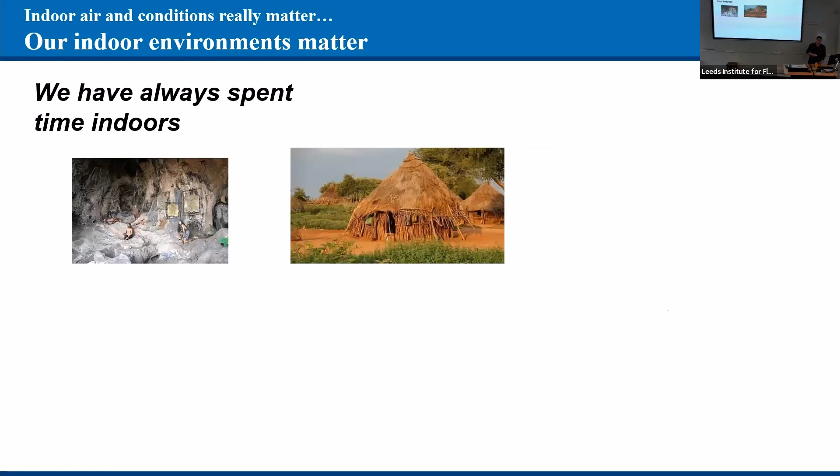So we've always spent time indoors, but we've never spent as much time indoors as we do now. And wherever you look, you get slightly different estimates, but it's a large chunk, 80 to 90% of our time indoors. And that means that our time indoors has enormous consequences in a number of ways.

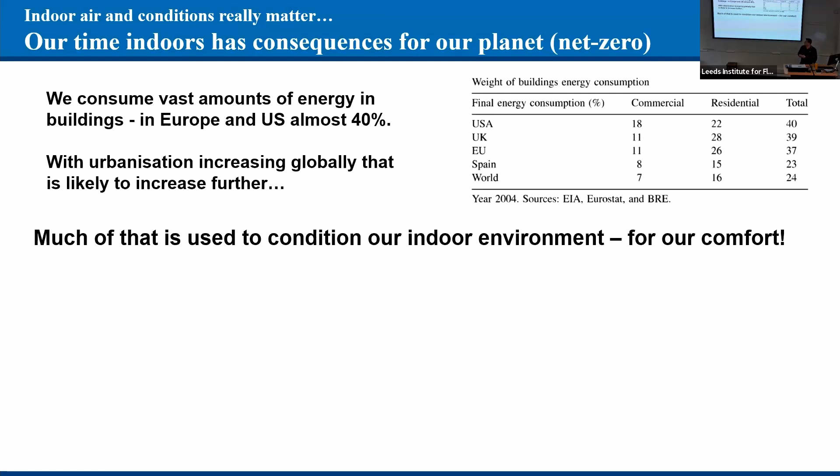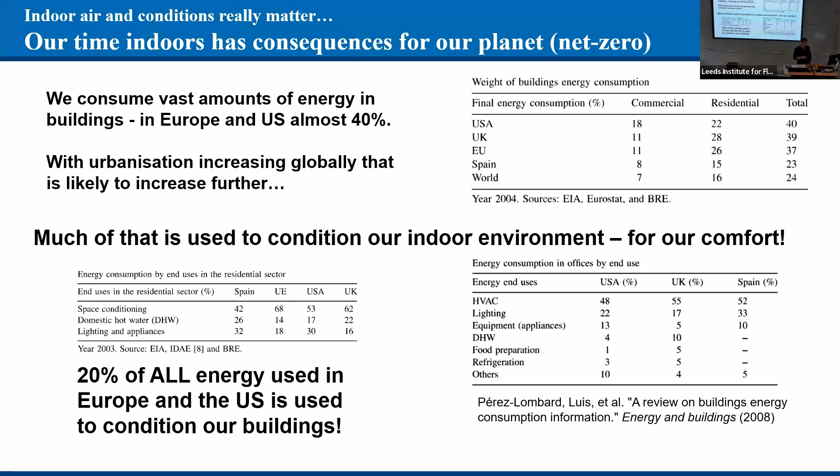The first of which is our energy consumption and the implications for our planet, and what we increasingly call net zero. In the Western world, we consume almost 40% of our energy in buildings, and a big chunk of that is used just to condition the indoor environments that we experience. So you end up realizing that we consume about 20% of our total energy budget just in conditioning our indoor environment. A really important factor for net zero.

Our time indoors also has consequences for our health. And those health outcomes are derived from the exposures that we have indoors. This review attributes around 3 million deaths per year to indoor air. So it's very significant - the time that we spend indoors has massive impacts on our health and well-being. I think that's something that research is starting to unpack more quantitatively as we look forward.

Crucially for economics, it also affects our productivity. We know that going from poor air quality environments to good air quality environments improves our cognitive function and productivity. And we've already said that indoor environments are really crucial for meeting net zero. So these are all really big motivators for research and also levers for change, but they're not all well used.

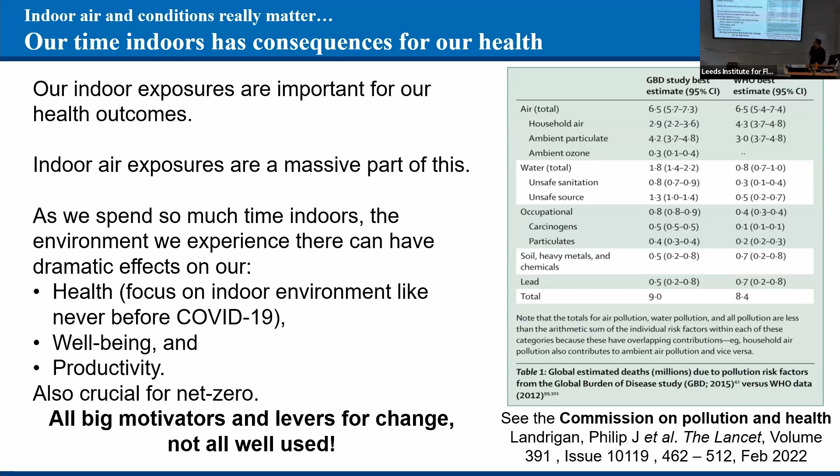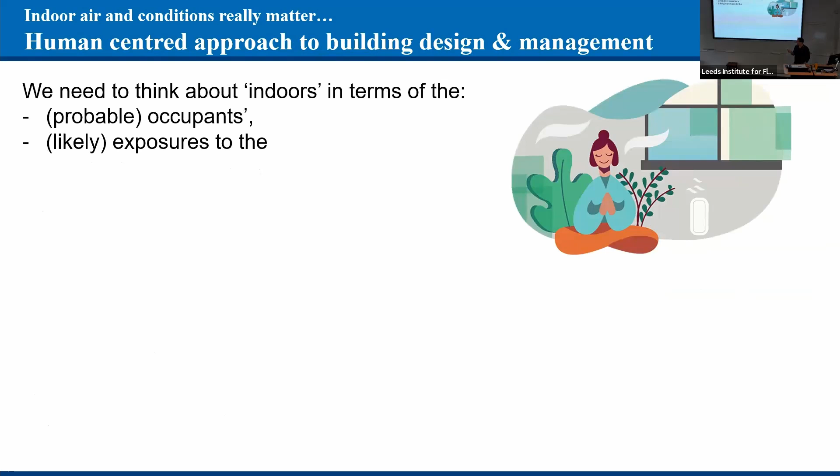And I think, when I met Kath, it really changed the way I think about buildings - to think from a human-centric perspective. So when I think about indoors now, I try and think about the occupants that might be there. I think about the likely exposures that they'll be subject to as a result of the indoor conditions and scalars there. And when we start to think about scalars, here we're including things like heat, moisture, and pollutants.

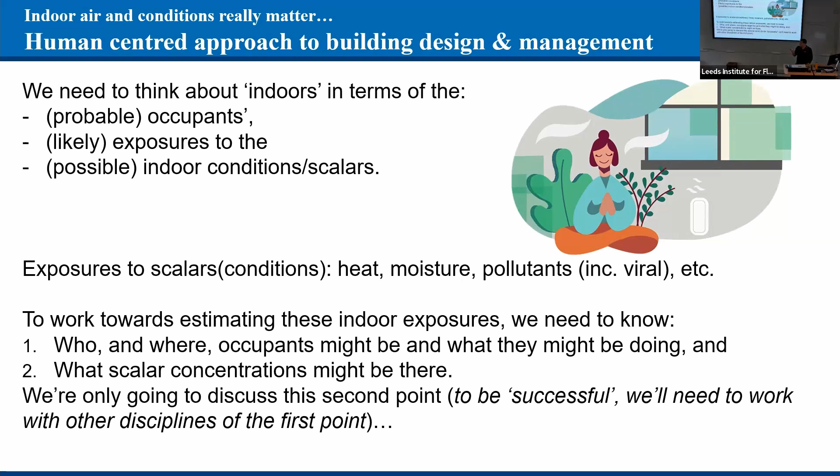But if we want to really know and predict what people's indoor exposures are, we'd need to know who and where the occupants are and what they might be doing, because their activities both change the production of pollutants and also change their breathing rate. And then we need to really have some way of estimating what scalar concentrations they might experience - that might be the temperatures that they feel or the pollutants that they might be breathing. So the first point is really interesting and something worth exploring, but the second point, what are the scalar concentrations, is what I'm really going to start focusing on today.

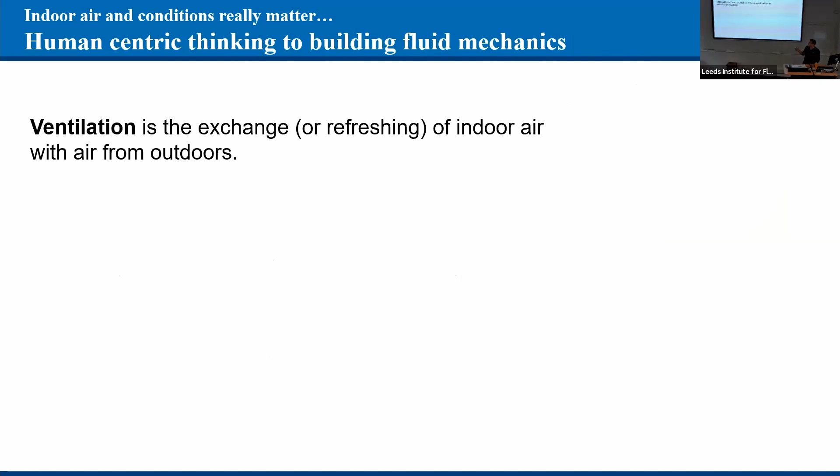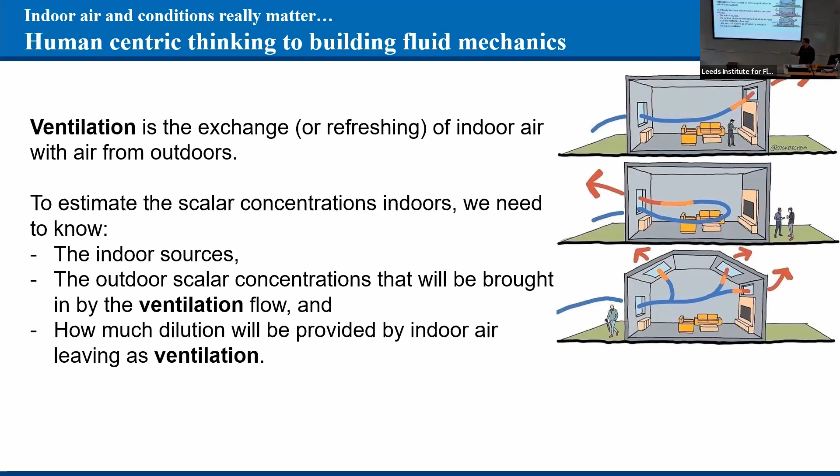You can instantly see these would have marked differences in the flows and exposures. So if we want to estimate the scalar concentrations, we need to think about the indoor sources, but we also need to think about the outdoor sources of scalars, and then the ventilation rates that might bring those outdoor scalars in. As the ventilating flow leaves, it will be providing some dilution. Two of these aspects are really dominated by ventilation, and that's what I'm going to focus on today.

We classify ventilation based on the forcing across the building envelope. When it's driven by fans, we call it mechanical ventilation. When it's driven by wind and/or buoyancy, we call it natural ventilation. And when we have a bit of forcing from each ventilation type, we call it hybrid ventilation. If we think about buildings, really everything's hybrid. You always have some extract, often in bathrooms, and whenever you open a door, you always drive a natural ventilation flow.

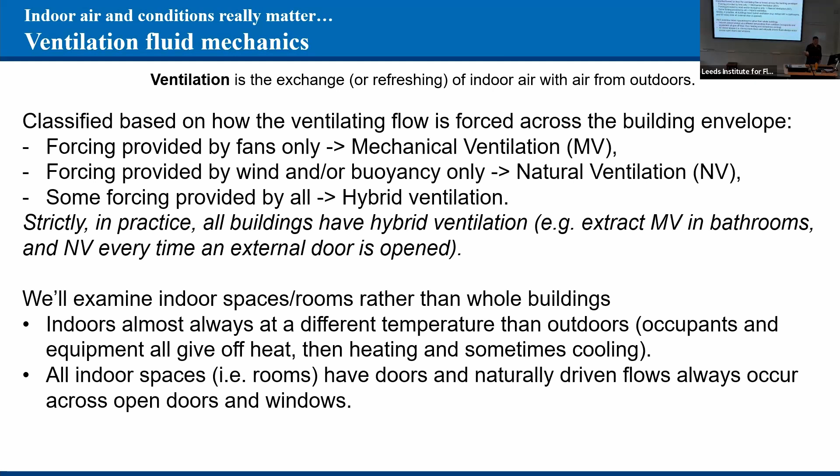So it's worth zooming in to the room scale to carry out some more detailed thinking and research. It's worth noting that indoors is almost always at a different temperature to outdoors. Because we want to move around our buildings, we always have doors, and so we always drive naturally ventilated flows across both open doors and open windows. So I'm going to talk predominantly around natural ventilation flows.

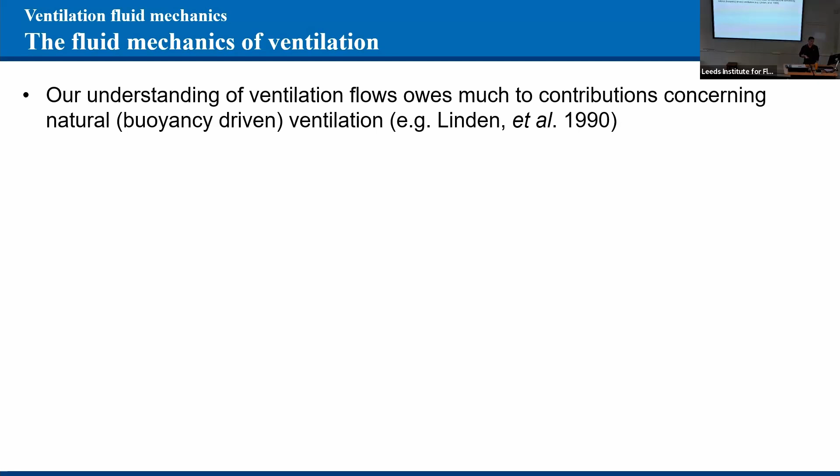Our understanding of natural ventilation flows really owes a lot to work done in the 80s and 90s, this seminal work by Linden, Lane-Serff, and Smeed, looking at buoyancy-driven displacement ventilation. But it's worth reflecting that this builds on work first done in the 30s to 50s on natural convection and plumes. And it was Baines and Turner who in the 60s thought to put these flows inside boxes, and it was that idea of translating this box model work into an analogue of rooms that really pioneered the study of natural ventilation.

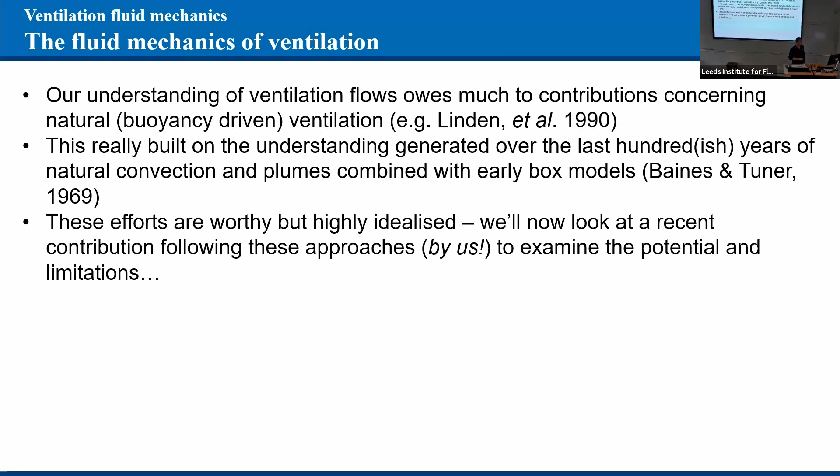These are academically very worthy, and we've learned a lot of useful things from them, but they are highly idealized flows. So I want to very honestly explore the potentials and limitations of these approaches, and I do so through some work that we've done. We're going to keep things really simple and only think about steady state ventilation flows in an isolated room.

We're going to have one door and one high level opening. And then we always have heat sources, but we're going to start by idealizing these into a single local heat source.

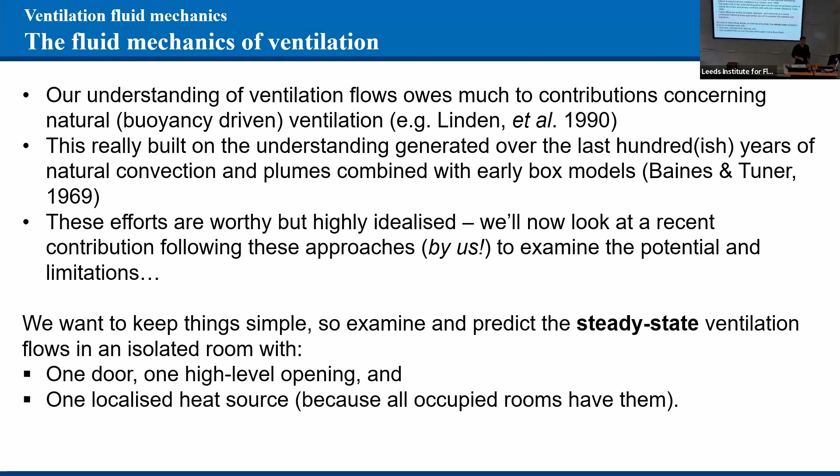So what might we get in this simplest case? If we look at Linden, Lane-Serff and Smeed, they had a high and low level vent, and they got a stratification at some height h. Because we're steady state, we conserve volume and buoyancy fluxes, and that tells us the upper layer must be well mixed. We expect there's going to be a turbulent plume formed in the lower layer. The equal and opposite ventilating flow in and out must be equal to the flow in the plume at the height of the interface, because there is no flow across the interface outside of the plume. So if we know the height of the interface h, then from plume theory, we will know the ventilation flow.

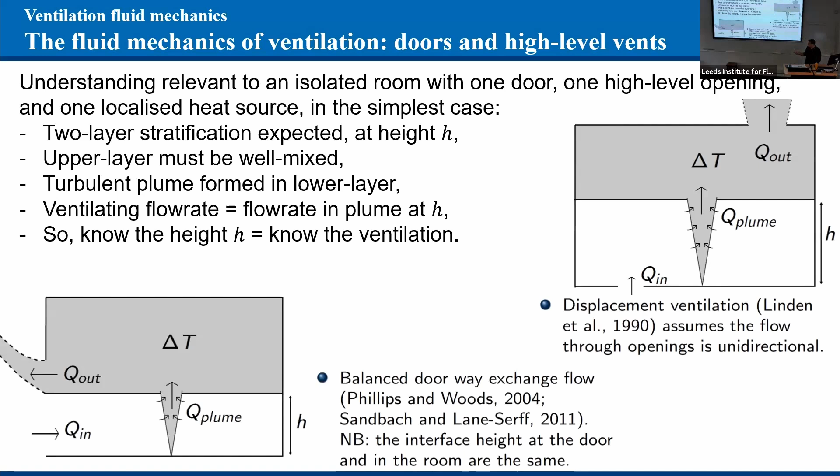The other body of work relevant to this configuration is these balanced exchange flows. Here we've got a doorway and no other ventilation openings, so the inflow and outflow across the door must be equal and opposite. Crucially, the physics is such that we can assume the interface height at the door is equal to the interface height at the room.

So when we look at our example, we have part of the outflow going through the top vent and part of it leaving through the top of the doorway. We call this an unbalanced exchange flow because the doorway exchange is not equal and opposite, and it means we can no longer assume that the interface height at the doorway is equal to the interface height within the room.

It turns out Tom did some nice experiments and realized there are at least three flow regimes. This is the classic Linden, Lane-Serff displacement ventilation, where the interface forms above the doorway because either the room is tall relative to the doorway or the top vent is large. Change things so the interface comes down within the room, and you can get an arrested doorway flow where the interface is below, but the characteristic buoyancy speed out is less than the characteristic ventilation velocity coming in, and it arrests the flow.

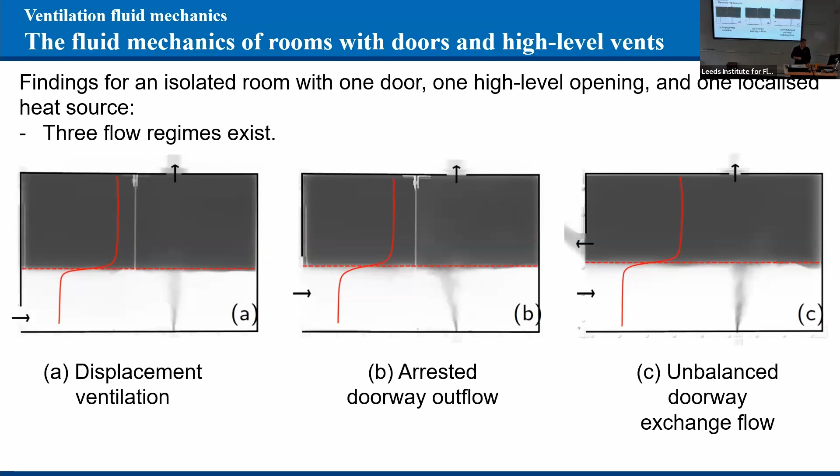But we're going to focus on this third type, the unbalanced exchange flow, which I just described to you. So as is standard in building fluid mechanics, we assume air to be incompressible and the flows to be Boussinesq.

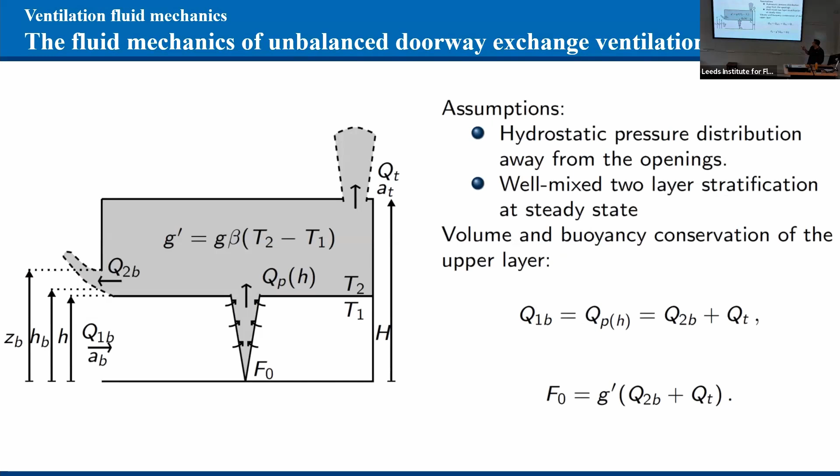We take the pressure to be hydrostatically distributed away from the vents, and the steady state imposes that this upper layer must be well mixed. And then we can start writing down key facts.

One is the description of the flow in the plume at the height of the interface. We then rest on the concept of a neutral pressure level, which, when you think about it, the pressure distribution inside and outside the room are such there must be a point within the height of the room at which the pressure is equal inside and outside of the room. And that height we call Hn.

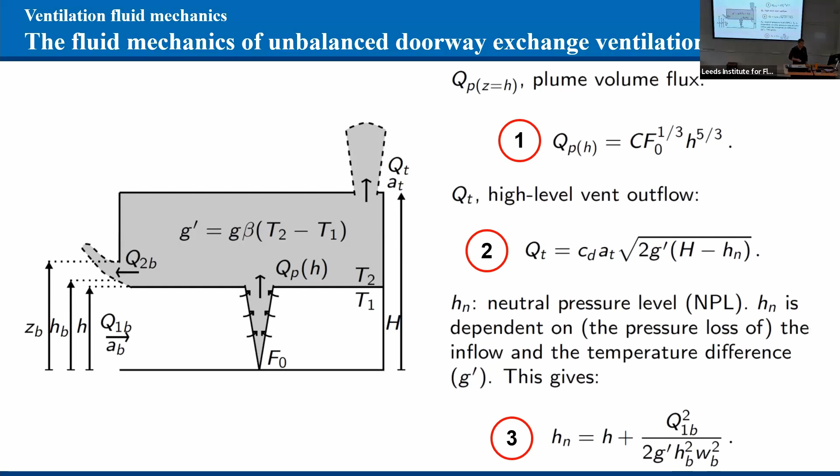And it's the buoyancy potential above that height that's going to drive the flow through the top vent. The difference between the neutral pressure level and the height of the interface is set by the energy head loss of the inflow, which we take to be fully dissipated in the lower layer without consequence. And then we need to lean on two-layer hydraulic flows to look at a composite Froude number and know that must be unity.

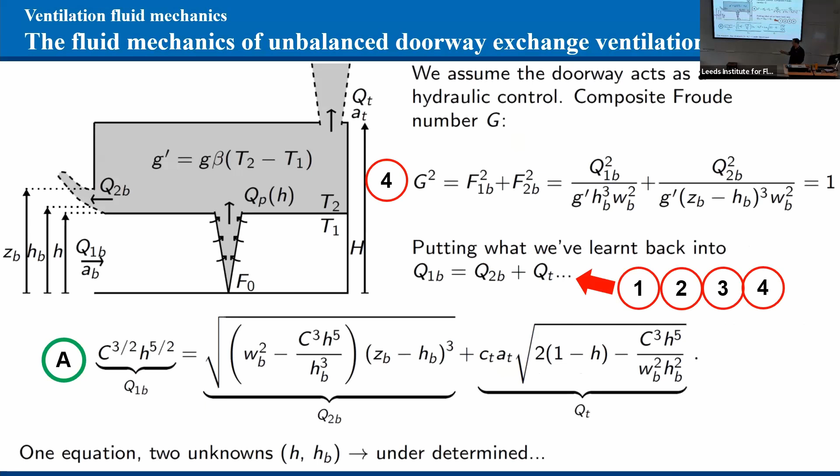We shove all of that back into our conservation of volume, and we end up with one equation, but we have two unknowns, our interface height in the room and our interface height at the doorway. And so we need more.

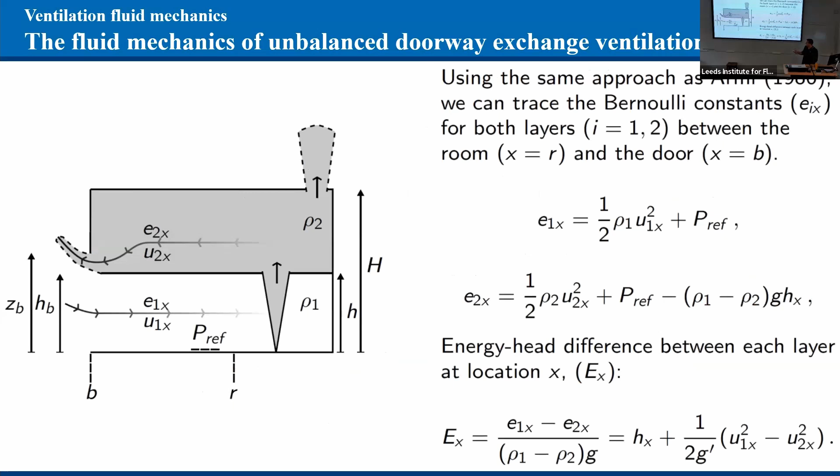And we go to look at the energetics of the layers, the two layers, and we look at the energy head difference between the lower layer and the upper layer. And we do so at the door and in the room. And then we ask, what's the change in the energy head difference between the doorway and the room? We argue that must be set equal to the loss of kinetic energy head in the incoming ventilation flow. And this gives us another equation.

We reuse our Froude number, we rearrange our plume theory, and now we have a second equation, again in our two unknowns. And so we have a closed system, and we can predict the interface height.

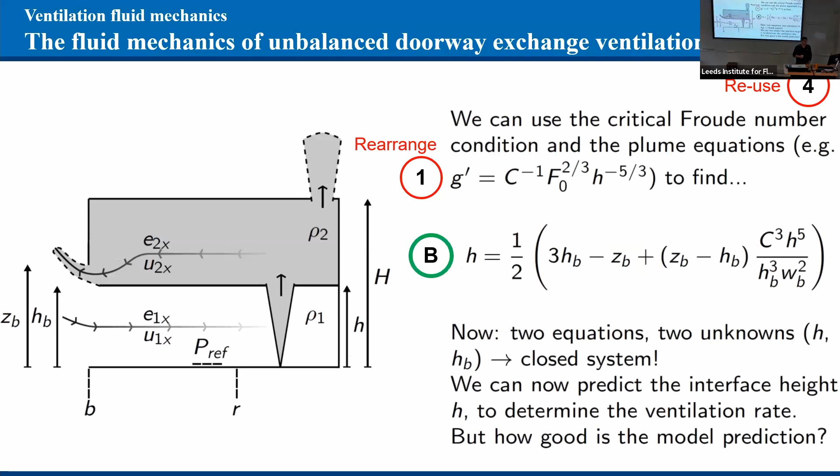So the question is, how good is the model? Tom does some experiments. You can see over here on the right, he's tracking the interface height, going through some transients, starting to settle to a steady state. In the black, a nice quantitative evidence of a relatively sharp two-layer stratification.

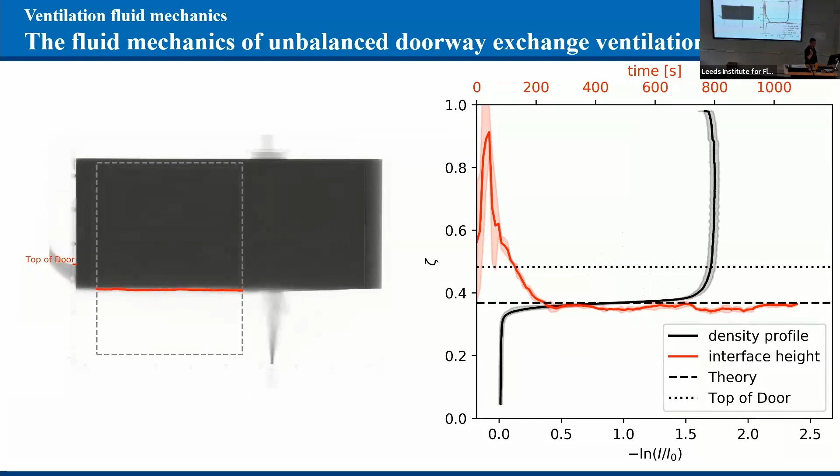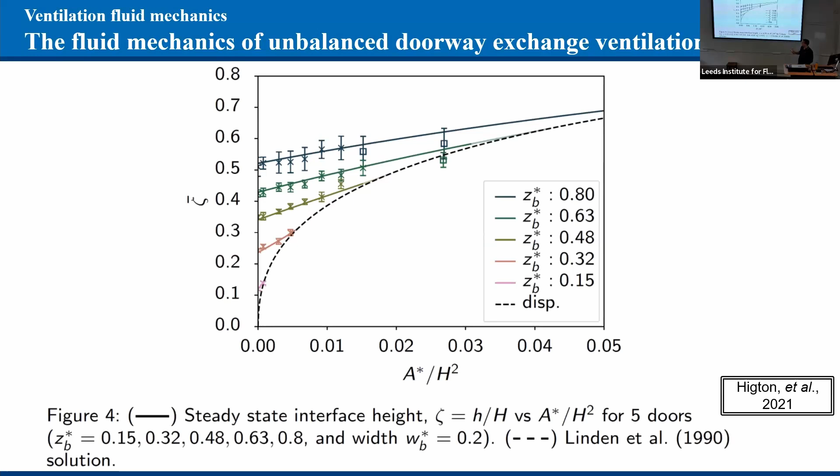And this interface height is heading nicely towards the theoretical prediction. Tom here has chosen a dimensionless doorway width, and then shown data for five different dimensionless door heights. The markers are his experimental data, and the appropriately colored lines are the theory for that configuration. So the model works well.

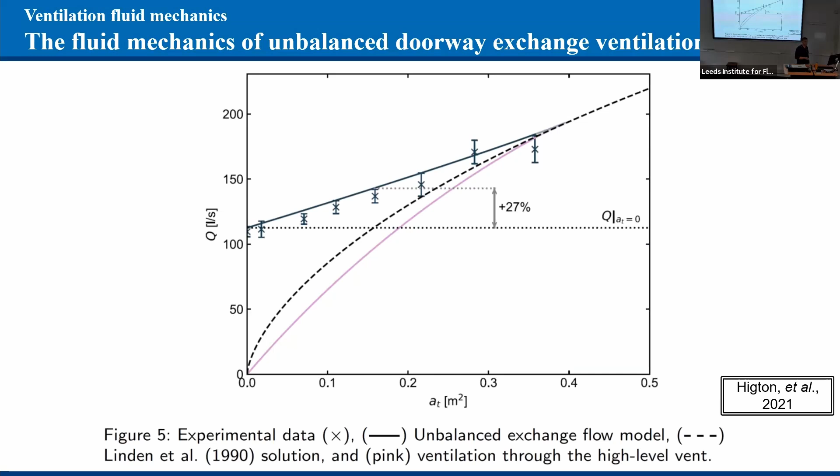So after all of this, what have we really learned? I think my takeaway message is that even the simple, think about the simplicity of the configuration, it's not simple to analyze by any means. And then reflect that we arbitrarily chose to localize all of our heat inputs into a single point. Well, what happens if we had gone the other way and said, let's just uniformly distribute our heat source all over the floor? What's going to change?

So I'll show you a video of this, but the important thing to say is you can think of this as being a heated floor, and you've got a top vent up here and a doorway up to about this height. The crucial thing here is that before I start the video, Tom has spent about an hour running this experiment to steady state, so all of the flow is in a quasi-steady state.

About 10 seconds before the video starts, he's burst a balloon of neutrally buoyant fluid outside the door. Your eye is going to be drawn to seeing this transient scalar evolution, but remember that the scalar is just evolving in a steady state flow.

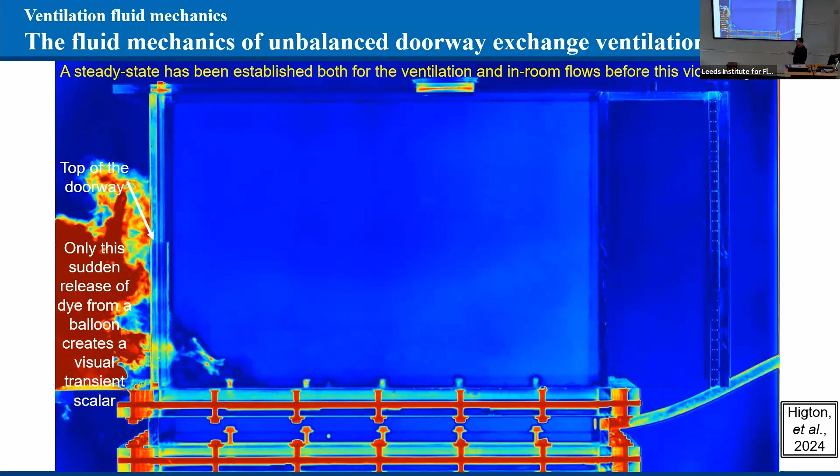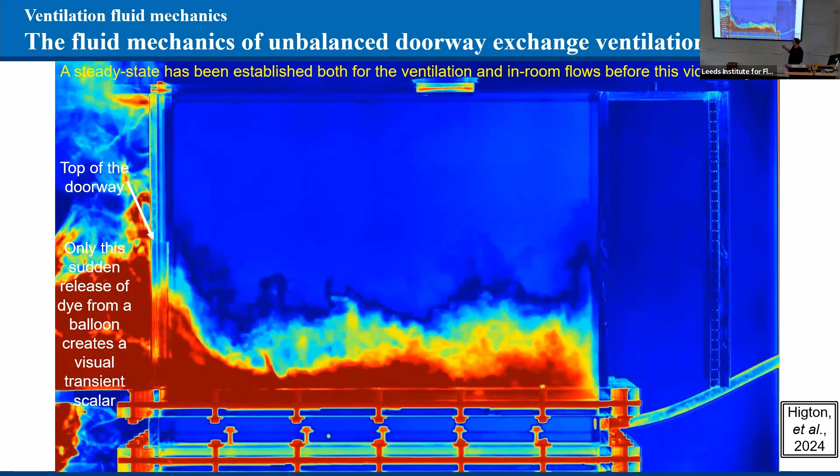So what happens, we can start to see, call it cold air if you like, coming in through the lower part of the door, and presumably some undyed fluid is leaving through the upper part. This relatively cold air-like fluid travels along, getting warmed. It rises up this far wall, and some of this flow has enough momentum and or buoyancy that it gets carried up and out of the top vent.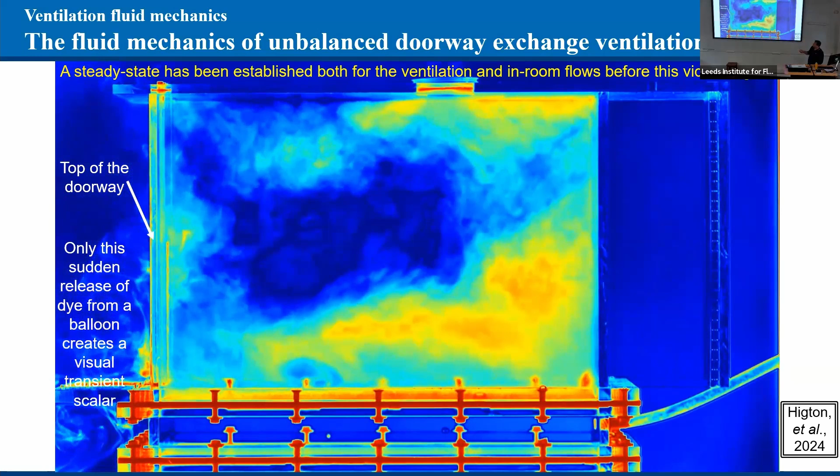But what you'll start to see is that not all of this rising flow is going up the wall. Some of it is exhibiting fountain-like dynamics here, slumping back down, and we're going to start to see the dye evidencing that the flow also has an intruding gravity current going right to left in this video, and that would ultimately carry on and go up and out the window. We'll stop the video before you see that, but just note that the dye, at least in this scenario, is indicating that the flow is not well mixed by any means.

So we've just changed to the second easiest canonical case, and things are really difficult to understand.

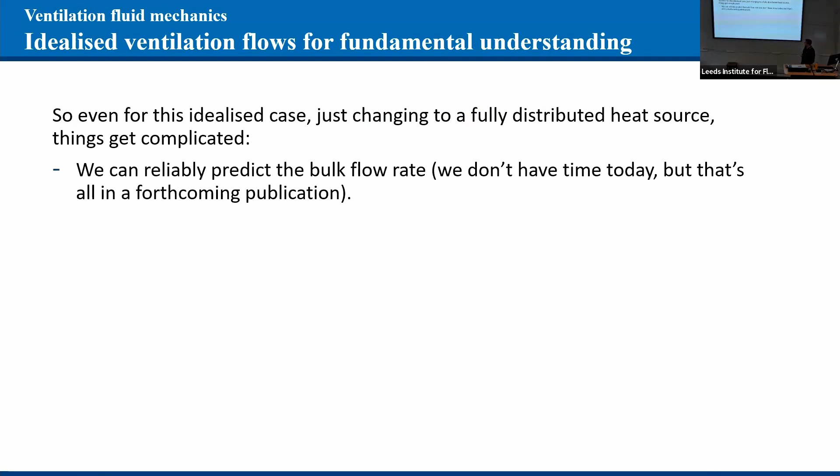Reassuringly, we can predict the bulk flow rate, but that's no good if you want to think about exposures. If you want to think about exposures, you need to be able to predict the in-room flow, and we can't do that at the moment. Let alone if thinking about how comfortable people feel depends on the stratification—there's no simple modelling to explain either.

So let's make things slightly simpler and go back to the displacement flow case, but we're going to keep our distributed heat source. All the theory predicts that we should get a well-mixed room. And then Carol Ann did some very nice numerical simulations. These were really hard because we wanted this room, which is this middle box, to be naturally ventilated. So you need these really quite large domains above and below to actually ensure that the flow isn't affected by your ultimate boundary conditions.

This is the schematic of the classroom. Carol Ann's inputting heat along the floor. You can see a lower vent on this side, and then Carol Ann's going to look at two configurations: a single-ended case where the vent is at the same end of the room as the low-level vent, and an opposite-ended case where the top vent is moved to the far end of the room.

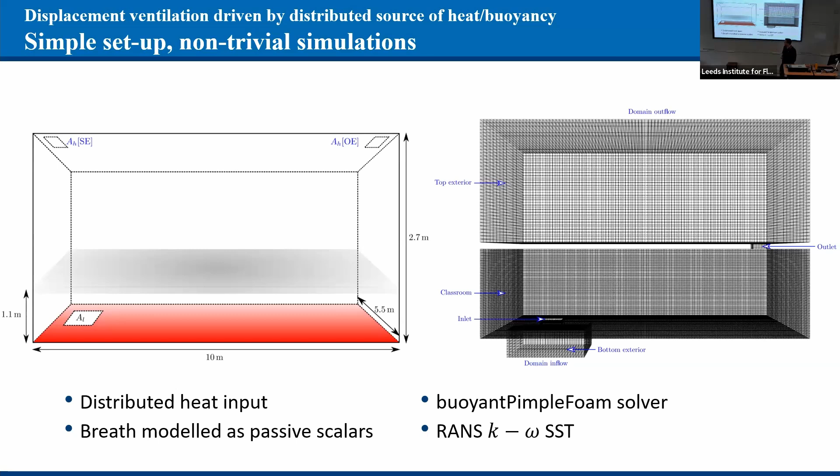And then we're going to introduce within this breathing zone a scalar marking the CO2 emitted by 32 people's breath. And when we look at the streamlines of the age of air here, we can already see drastic differences between the single-ended case and the opposite-ended case.

This part of the flow is looking quite similar to Tom's experiment—it's running along the floor and up and out. Obviously, Carol Ann doesn't have an outflow back over here, as Tom did. But in the single-sided case, we're getting a much larger whole-room circulation.

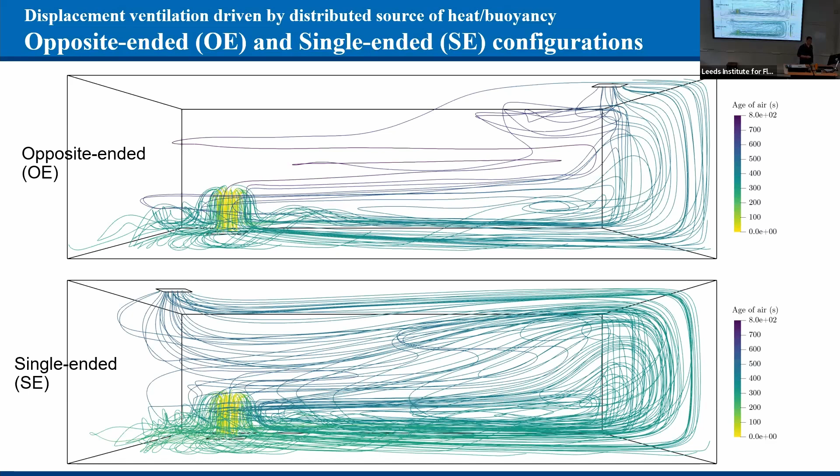So if we look at the temperature and CO2, and we mark the predictions of a well-mixed model with these dotted vertical lines—opposite-ended configuration in blue, single-ended in red—for the temperature in the upper part of the room, we get something close to the well-mixed predictions, but then we're getting a marked cooler region for a large chunk of the room. And if you look, temperature differences of 2-4 degrees are really enormous, and occupants would feel that very strongly.

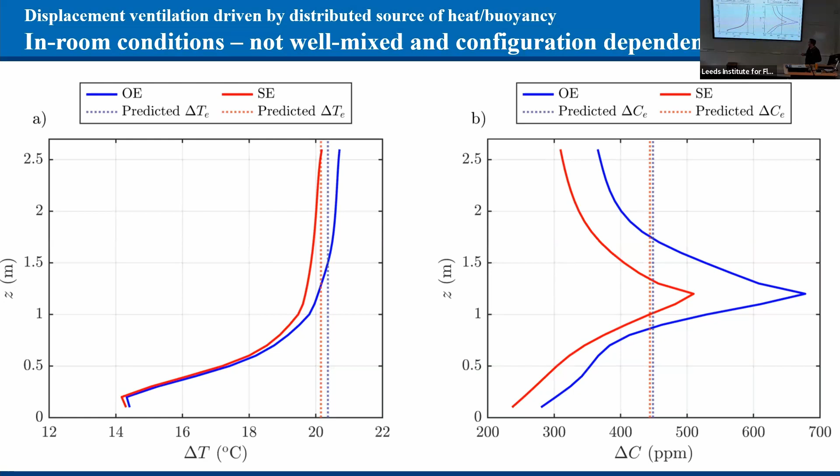CO2, we get a completely non-monotonic distribution with peaks in the breathing zone, very, very different to a well-mixed space. And whether we look at the CO2 distributions in the whole room, or perhaps more relevantly, just in the breathing zone, we first of all see that the distributions are wide—they're very far from being well mixed. But importantly, they differ quite drastically between the two configurations, and there's no modeling that would capture that that's being developed at the moment.

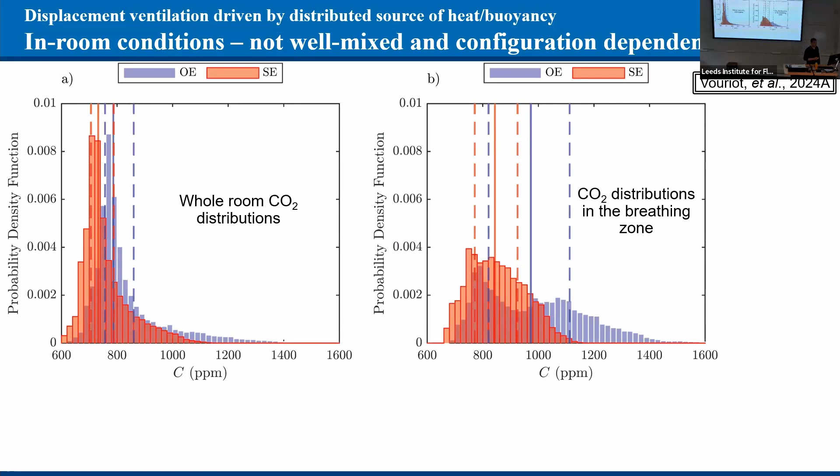And then we take a deep breath and we look at actually what we're doing. Remember that models are just models, and we're missing so much important physics in these models, and it's already quite complicated. So the three things that came to my mind are: one, in real rooms, there's a lot of additional mixing, and that can be occupant movement.

Which I think Kath and Andy Woods have looked at a bit in corridors. Could be opening and closing doors—Abigail Hathway's looked at that a bit. But we need to get these things systematically built into our thinking and modeling of indoor environments.

And then there's radiation. Radiation acts to redistribute heat between any warmer and cooler surface in the room, and that includes our skin. We give off about 50% of our sensible metabolic heat output as radiation.

And then, of course, we've been looking at steady states, but all rooms are transient. So at best, we need to be thinking about this sort of system moving dynamically from one steady state towards another.

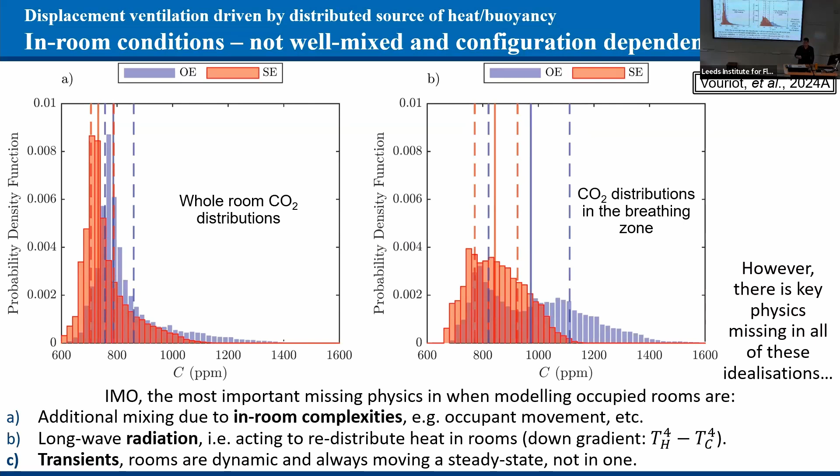But I'm just going to talk about one of these, radiation. And again, we're going to do some numerical simulations of displacement ventilation. And we're just going to have a single occupant in the room.

Our single occupant - our dimensionless room height is 1 at the ceiling, and our occupant is standing up, giving off heat up to about 70% of the height of the room. If you do some simple theory, it predicts that you'll get a well-mixed lower layer to about 60% of the room height.

And if you run the numerical model without any radiation, the temperature distribution, or buoyancy equivalently, you get is shown here. And it's not bad - it's roughly a well-mixed lower layer up to about 60%.

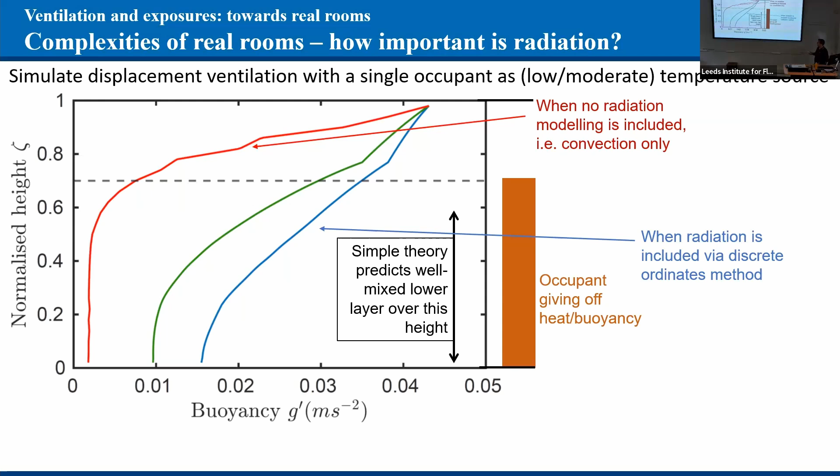But then if you run the same simulation, just with radiation included, and we're not changing the total heat flux, we're just changing it from all convection to 50% radiation, 50% convection, then your temperature distribution in your room completely changes.

So we have done quite a lot of work thinking about how we could mimic this. The radiation simulations take about 3 to 4 times as long to run, much more painful to set up. And so we've been thinking about simple methods that don't increase the runtime if you do a bit of thinking in advance, but they're far from perfect.

So for radiation, at least, I think we've got a long way to go, but I think it's something we will make progress on over the next years.

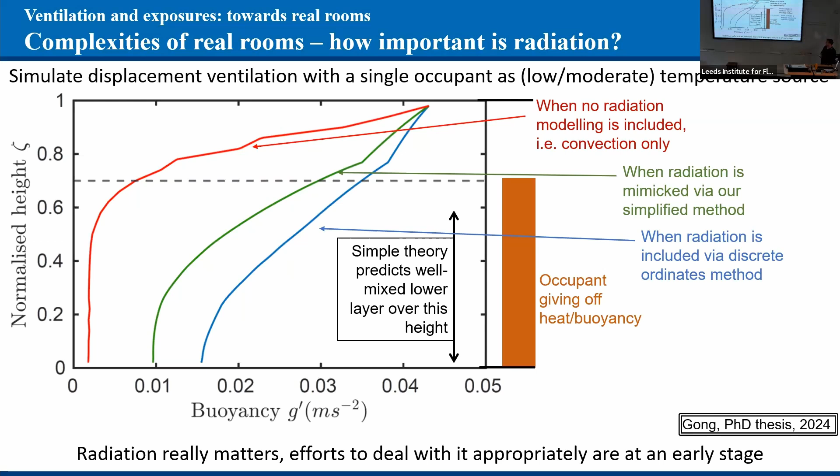So we've seen that the fundamental bottom-up approaches have really made huge contributions, and I'm sure they will do as we move forward. But there's a drastic gap between doing what we need, which is to be able to model and predict the environments that humans experience in our buildings, and what we can actually do based on existing knowledge.

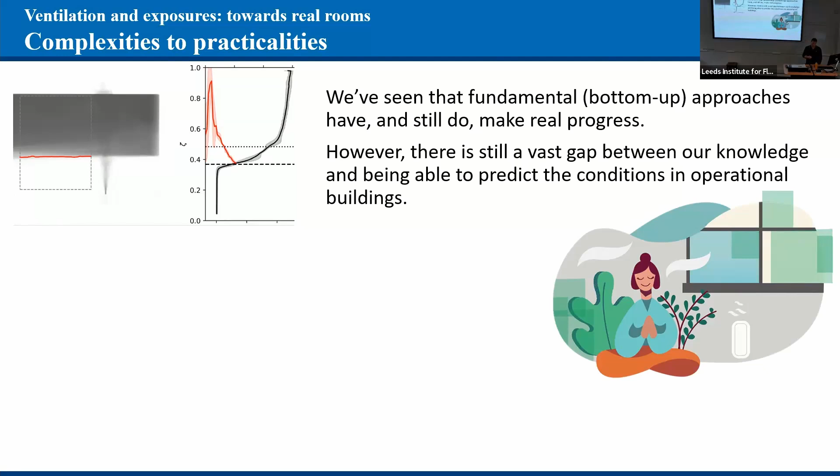And I think that's led me to reflect that we need to really embrace this top-down approach as well. That's particularly realized because indoor environments are so easily exploited in terms of becoming a data-rich environment, and that's not been done to the extent that it can be based on modern technologies.

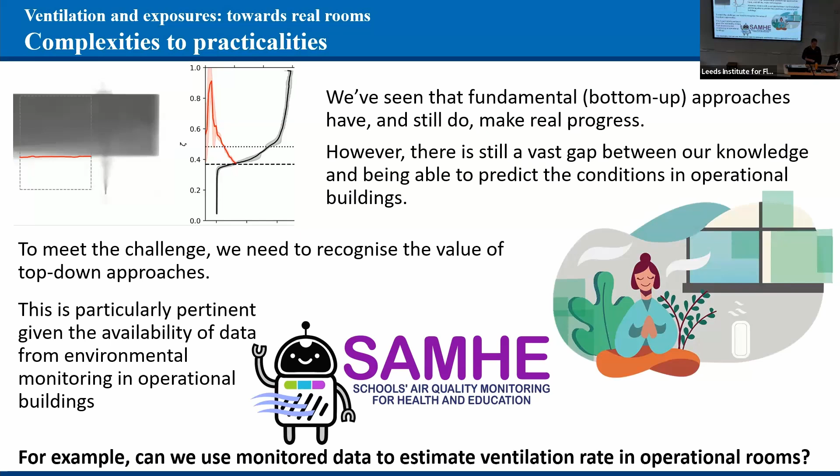So the work I'm going to talk about for the rest of the talk has been undertaken within the SAMHE project, and it's really trying to ask the question: how can we use monitored data to estimate ventilation rates? Remember, these are one of the key factors in enabling predictions of indoor exposures.

So we can't measure ventilation rates directly because there are so many non-trivial pathways for flows in and out of rooms. But we can write down a really simple conservation equation for any gaseous pollutant, but only if the room is well mixed. And we know rooms aren't well mixed, so we've got to move away from this.

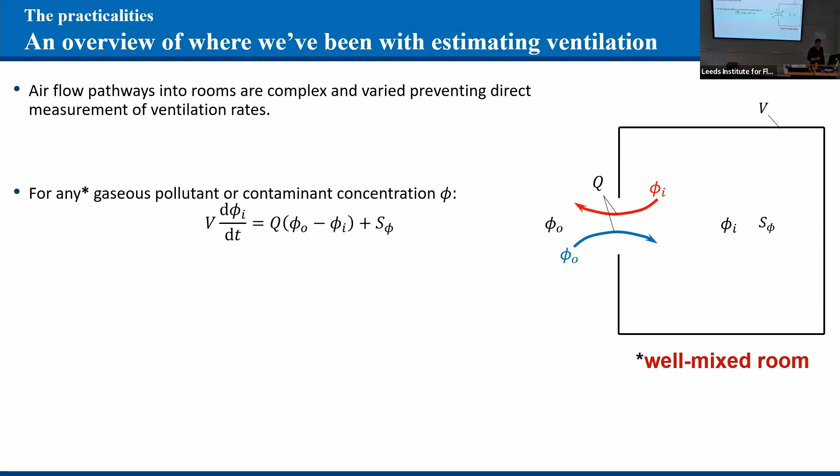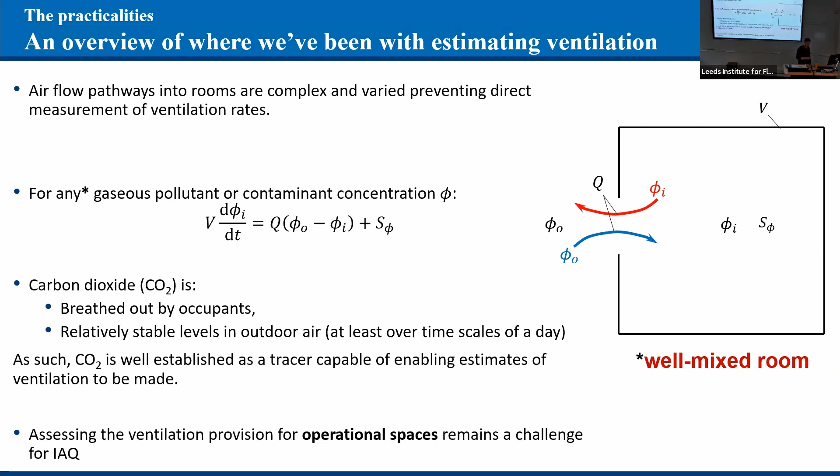Carbon dioxide is breathed out by all of us, atmospheric levels are relatively stable, and it's already quite well established as a tracer capable of estimating ventilation rates. But those estimation methods are often inappropriate for operational space. So I'll just run you through these.

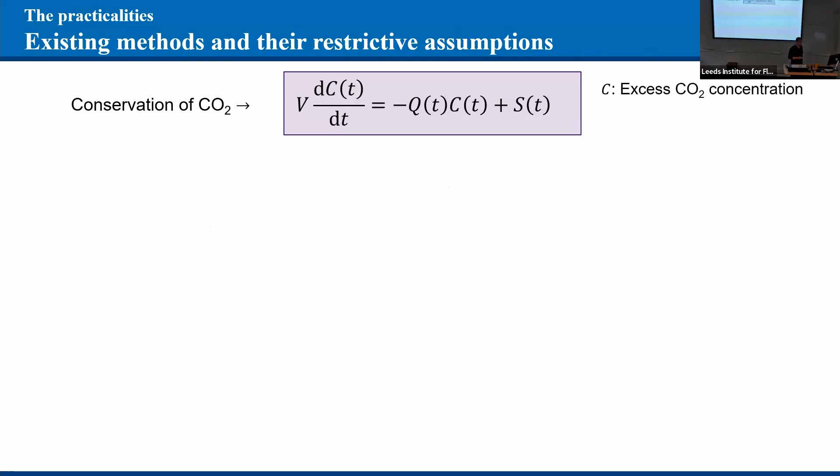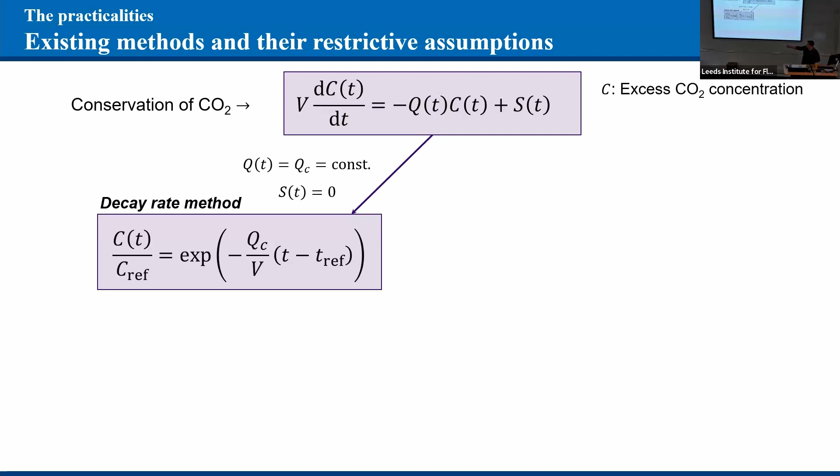What's typically done is you write down a conservation equation for excess CO2 - that's CO2 above the outdoor ambient levels. Then you are forced to assume that your ventilation rate is constant. And if you can turn off the source, which is obviously a problem for people's breathing, then you can simplify this to a decay rate method, and apply it to data, perhaps during an unoccupied period at the end of the day.

But that's really problematic because as people leave, they take their own heat loads with them, and they shut windows and doors for security reasons. So the ventilation rates you measure are not representative of those during occupied hours.

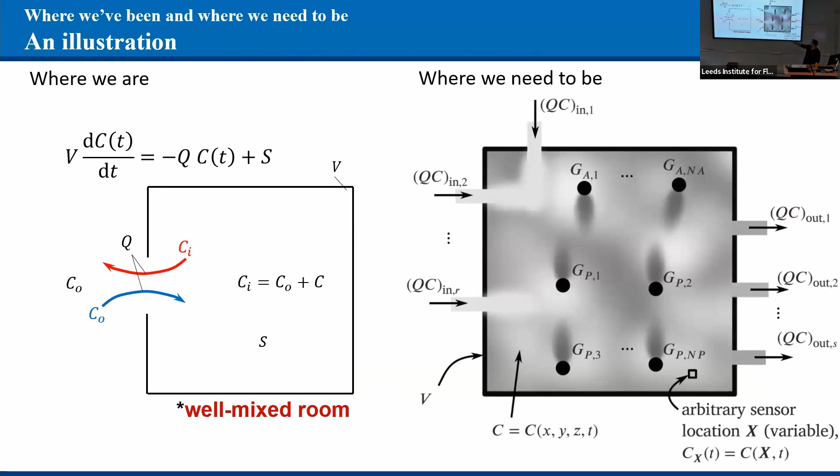Equally challenging, we have to keep our constant ventilation rate, but we can now have a constant source and leave the space for long enough that we might approximate it to a steady state and infer the ventilation rate from that. So we're kind of stuck over here on the left, but this on the right is really where we want to be.

So we take a classroom as an example, and we think about the fact that our occupancy, our generation rates, and our ventilation rate are going to drastically vary in time.

We can describe the sort of unmixedness of the room, if you like, by the ratio of excess CO2 averaged over the whole room to the excess CO2 that would be measured by a sensor at a particular location. We can capture that in some parameter, and then our outputs are going to be our CO2 data, which we can measure.

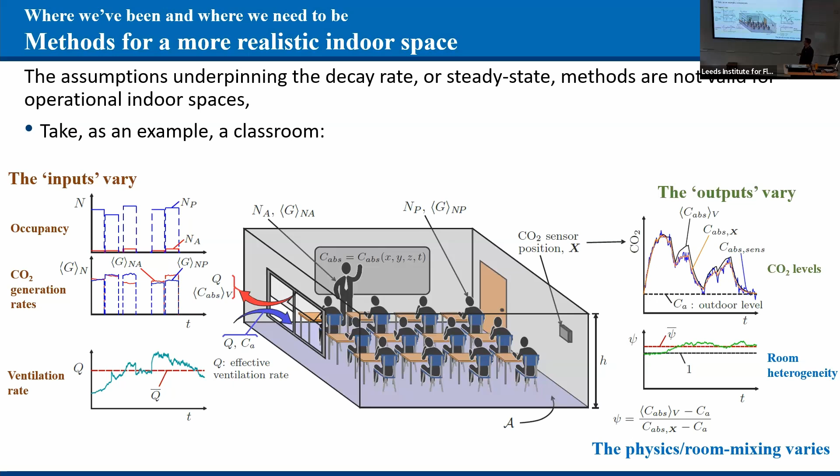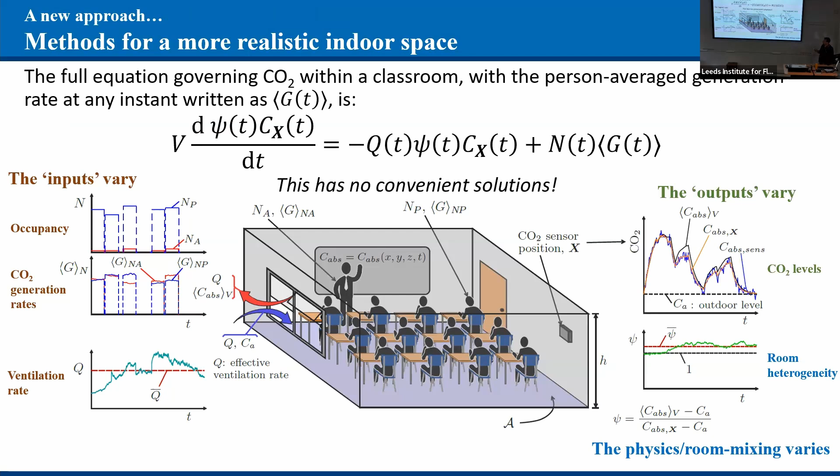To describe that fully, we need to solve this ODE. All of these functions vary in time and have no known functional form, so there's no way we can think about convenient solutions.

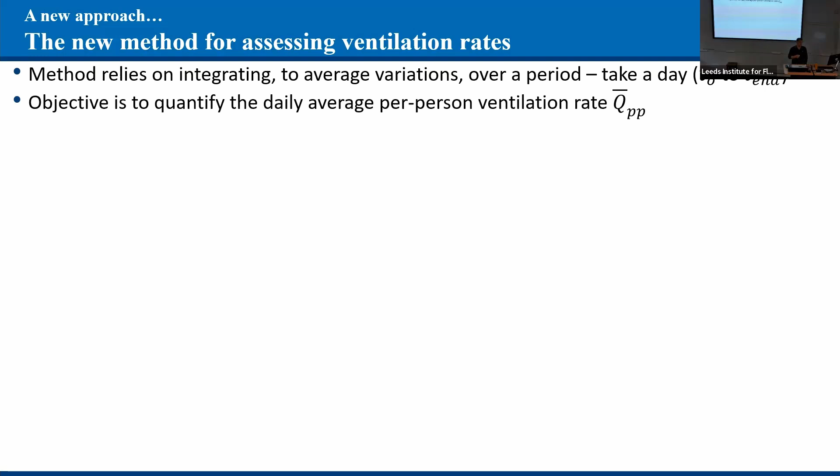So the method really relies on identifying a period before which and after which we can say that the excess CO2 is approximately zero. For the case of a classroom, we can think of our period as being one day. Over that day, we want to estimate the per person ventilation rate achieved over that period. We decompose our variables into a period mean and a fluctuating part, but not in a classical Reynolds decomposition — a geometric decomposition is more appropriate here. Then we can actually solve the full equation to give this.

So we can write our per person ventilation rate as a product of the fraction of occupied time times the average generation rate divided by the average measured CO2. When we look at that steady state fraction, we can see it's analogous to the steady state method. These prefactors — alpha, beta, and psi bar — are our integral parameters. And what are they? They're horrible.

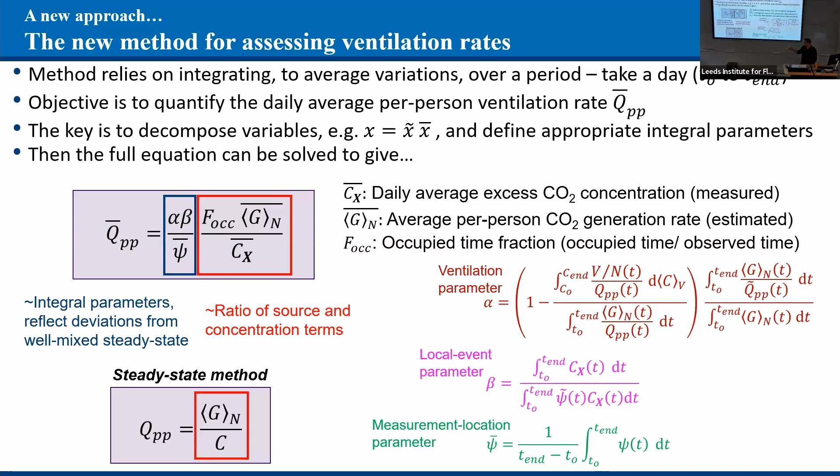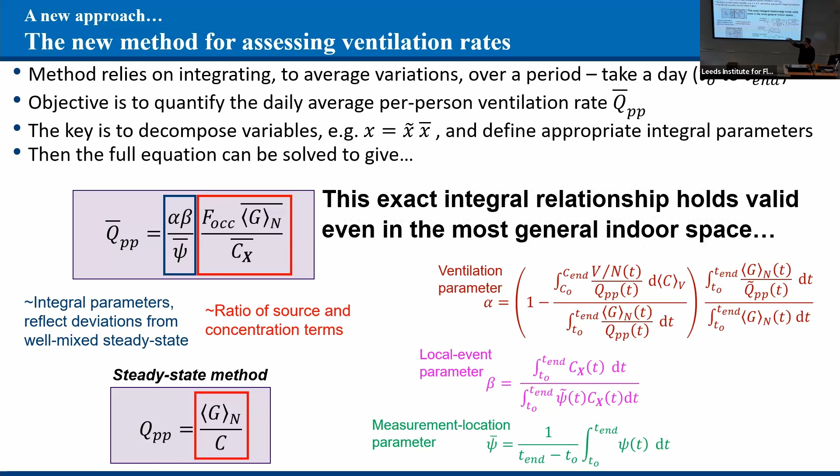This alpha captures all of the effects of the ventilation rate dynamics. This beta is a parameter that captures events that are locally either in space or time. And then this last parameter captures the impact of the choice of measurement location. Forget about the detail for now and just reflect that this is an exact integral relationship that must always be true, even in the most general space.

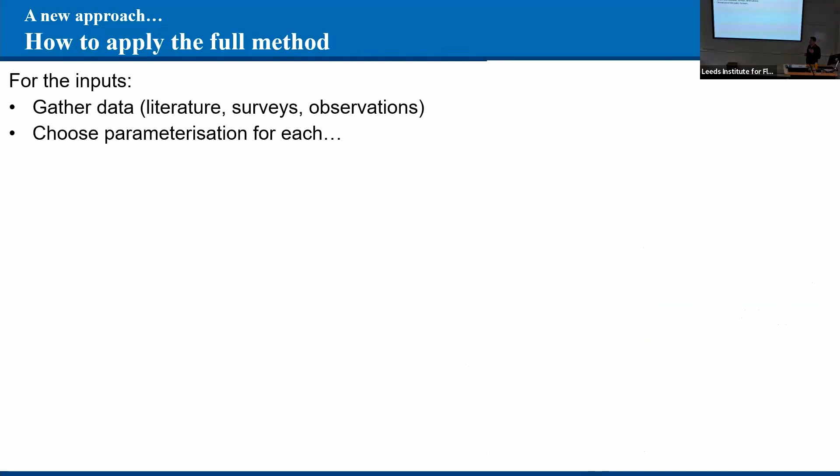So how on earth do you go about using it? You have to gather data for the inputs — it could be literature, survey, observations, etc. You have to choose some statistical parameterization for your input data.

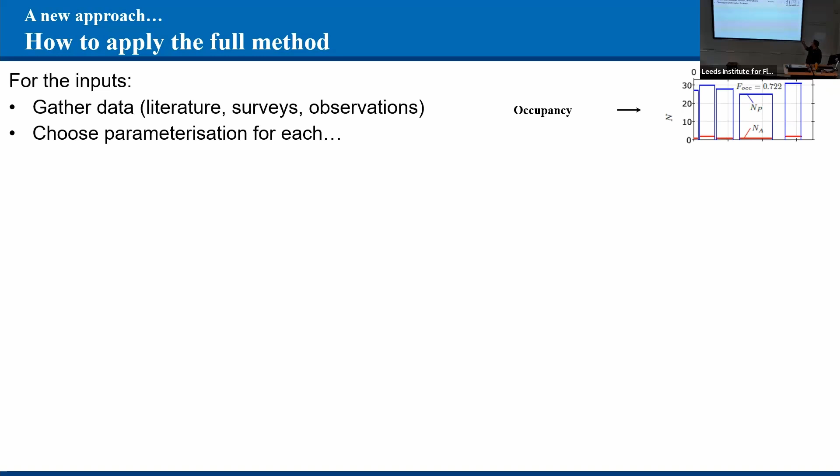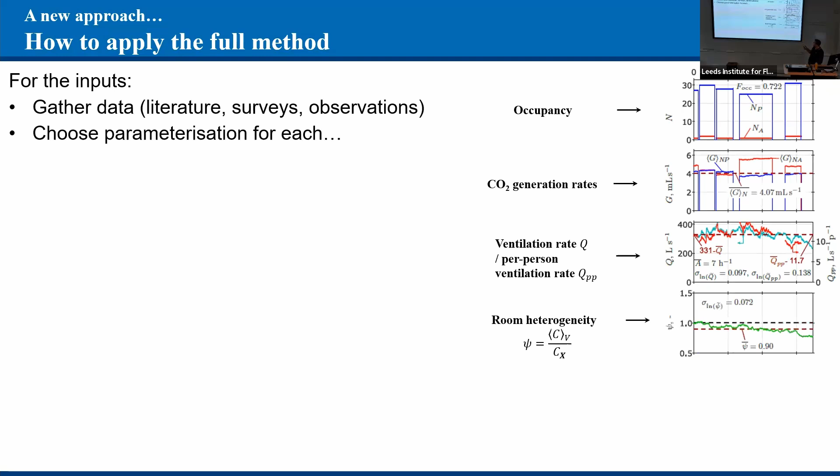For example, this is a simulation that Josh did, and this is the occupancy that he input over the course of the day. This is the CO2 generation rates associated with that day, and this was the ventilation rate that resulted on that day. And this is our room heterogeneity parameter over the course of the day.

You can then simulate your ODE using Monte Carlo methods, and for every single simulation you get the measured output of CO2. You know what the numerator of your steady state fraction was for that particular simulation, and importantly, you get an evaluation of alpha, beta, and psi bar. This enables you to quantify the distributions for all the parameters over all of your simulations, and then provide some estimate and quantify uncertainty.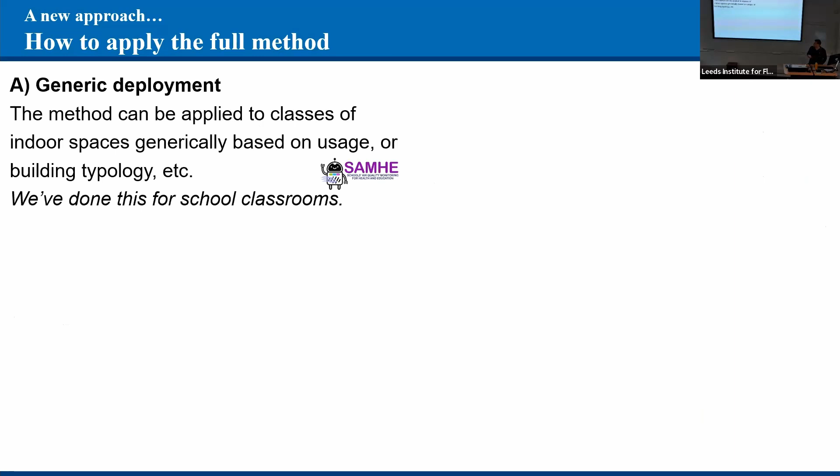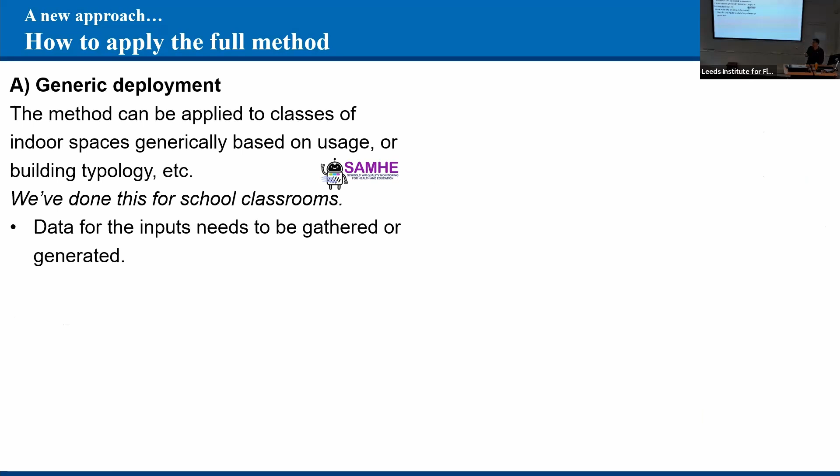So broadly speaking, you can think of using it in two ways. Quite a generic deployment where you choose a building typology, which we've done for school classrooms — it's quite a big body of work. I think it took Josh, well, to redo it would be three months maybe in another space — quite a lot of work. You have to have data, and classrooms are good for that — you know timetables, etc. Run the simulations to get your integral parameters.

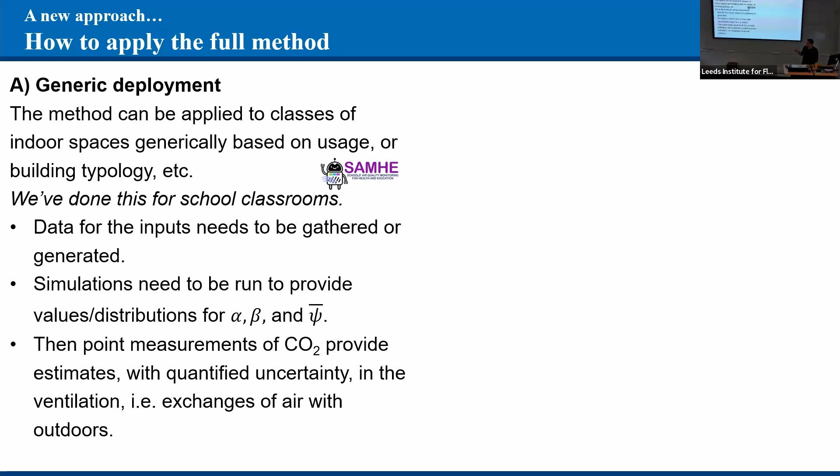Once you've done this for a generic set, you can then use real measured CO2 data to estimate the ventilation rate. The other way is to look at specific deployments — so if anyone here has got appropriately measured data, you can use this method to estimate the ventilation rate associated with that period of measurement. The generic method would work well for spaces like open plan offices, if anyone's looking for something to do.

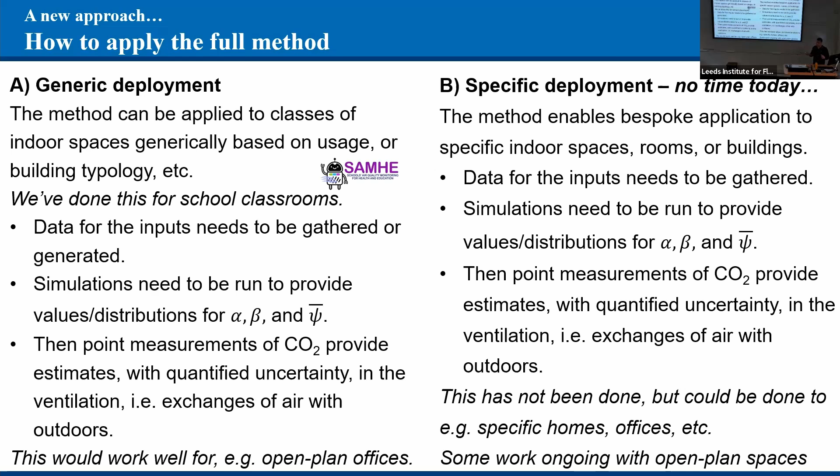So a little bit about SAMHE and how we gather the data for schools. It's a relatively novel project — we've written a couple of papers on the methodology if people are interested to read them. The key is that we really engage with schools. We gift them a nice air quality monitor, they connect it to their Wi-Fi, and then they get access to a really cool web app, so they can see all their data, play with it, and do activities to engage them in air quality and learning. But also some of them provide us more detailed research data as well. The key thing is that it enables large-scale deployment and hence mass data, which is really what you need to carry out this generic deployment.

The data I'm going to show you comes from one term, and I think we've got 10,000 school days of data that was suitable quality for analysis. So with the project we've done a lot — we've engaged 1,000 plus schools, lots of data, blah, blah, blah.

The most important thing we've done, I think, as of now, is we've established the SAMHE initiative. This creates a vehicle for schools to remain engaged so that they don't lose access to their web app — they can keep sending data, we can keep analyzing it. So it's a really nice thing to nest within future research projects.

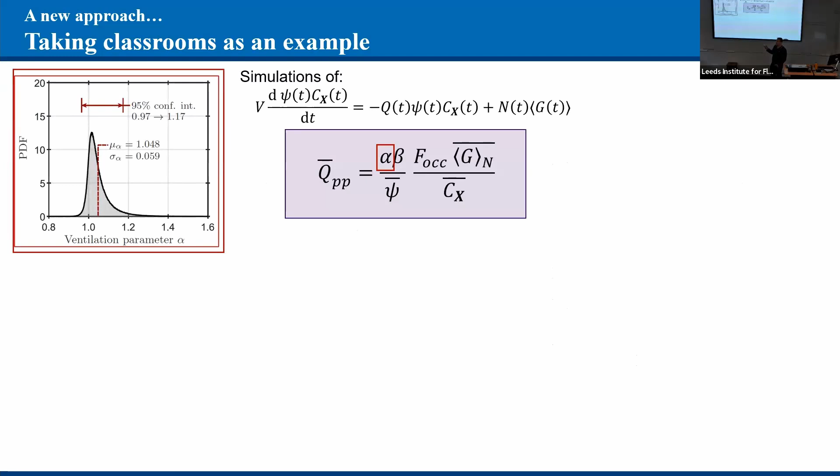All of the classrooms Josh simulates, I think like 100,000 school classroom days or something. This is the distribution of our ventilation parameter. The key thing is it's not far off unity, and its standard deviation is small. Even more true with the parameter beta.

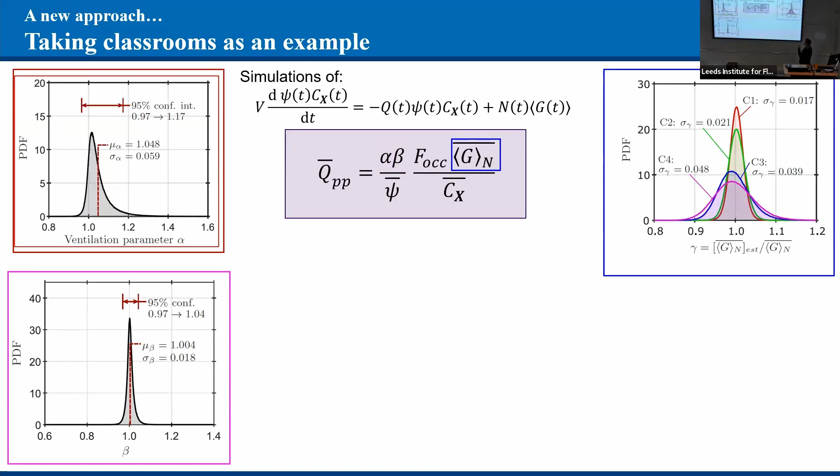The source term is really important. It provides quite a lot of variation in your estimates. The red curve is if you know lots about how that classroom's used, you get a narrow distribution. If you don't know who's using it, the data I'm going to show you is the C4 case, and you get a much broader spread. But this is only 10% either side of the mean, so it's not a killer.

And then there's very little information to parameterize this. The studies that Josh found, I think about four of them, give something like a 10% standard deviation in your estimates based on where you measure CO2, and that's what we took as a mean of the standard deviation.

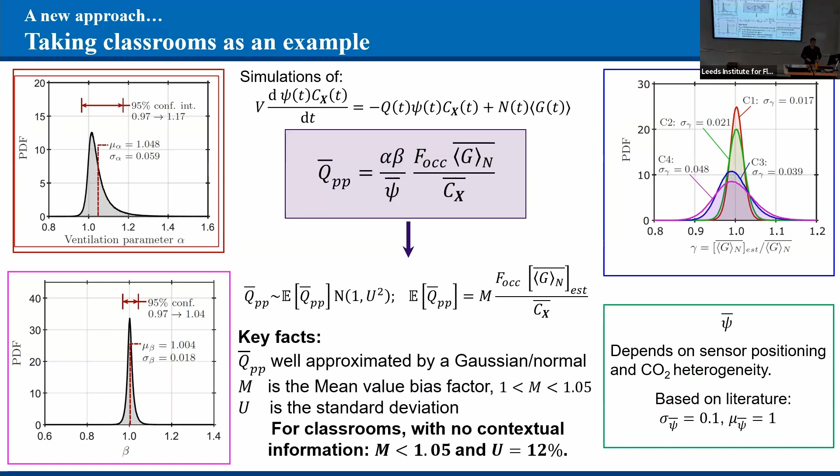So if you run this model for all of these distributions that we've input, you find that the expected value of the daily mean per-person ventilation rate has some pre-factor M, which we'll call a mean bias factor, and then our steady state fraction, and around that it's normally distributed with some standard deviation. Our mean bias factor for all those examples we ran was between 1 and 1.05, and U is the standard deviation. So, having no contextual information about the classrooms other than the UK classrooms, you get a mean bias factor of about 1.05, and a standard deviation of about 12. So for every day, you get this Gaussian distribution based on your measurement of CO2.

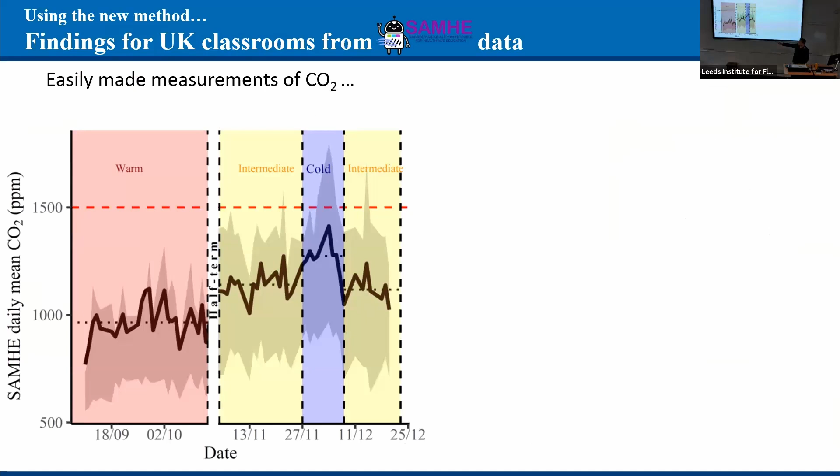So then Sam takes this data. This is the data over autumn term gathered in the SAMHE schools. He happens to have illustrated it based on whether the outdoor temperature was warm or cold, but that's incidental for this analysis, at least in the first part. He can translate these into, for every day, a new distribution, and plot, instead of daily mean CO2, the distribution of daily average per-person ventilation rate.

This is really important for IAQ modeling, because CO2 measurements are not useful for modeling pollutants directly. Estimates of ventilation rates are vital for estimating pollutants. So this is a real step forward. But they're not just useful for modeling - I think we'll be able to link health effects much more rigorously to ventilation levels than we can to CO2 levels.

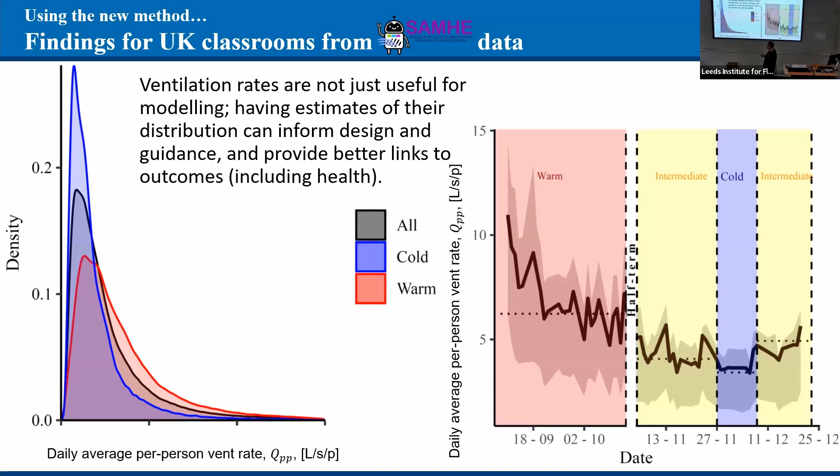And so Sam produced these three nice PDFs. The red data tells you that when it's warm outside, you're much more likely to have a high ventilation rate in your classroom. When it's cold outside, you're much less likely to have a high ventilation rate in your classroom.

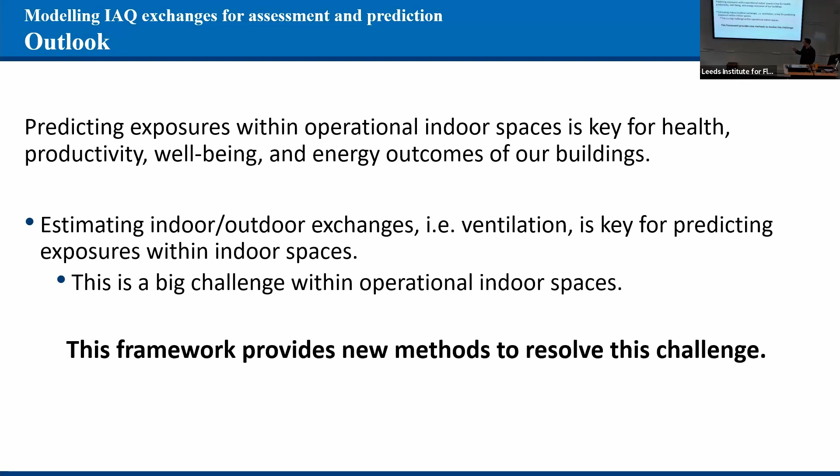This idea of predicting exposures is still a long way off, but it's really important for our health, productivity, well-being, and energy outcomes - these are all key factors. Estimating the indoor-outdoor exchange is vital - that's ventilation. The framework I present really resolves part of this challenge by providing a new method.

I think I'll leave it there and allow you to read this briefly.

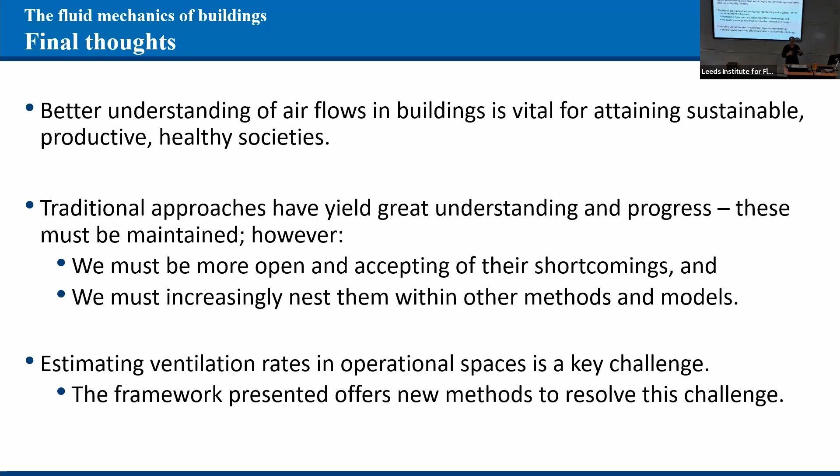I think this is one thing I would like to say, is that I do think that the bottom-up approach still has to keep coming. And I think increasingly, somehow finding clever ways to nest models together and link them is really important.

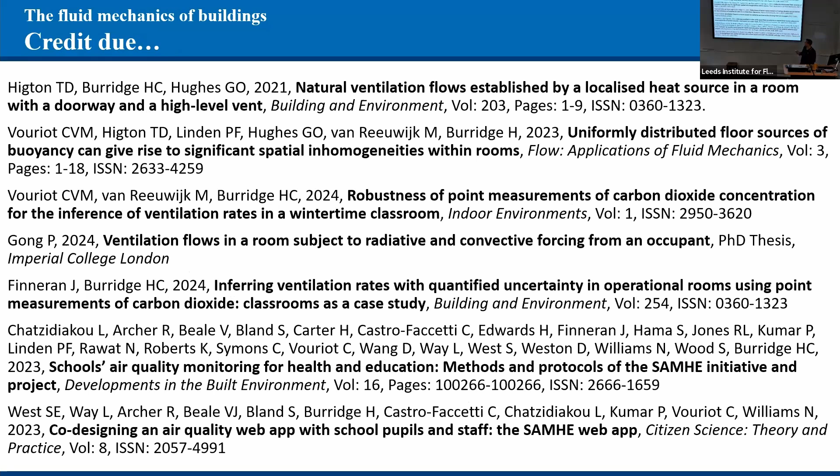And then I just want to give credit where it's due, and note that there are an enormous number of names on this slide. So I'm just a very small part of an effort. Thank you for listening.